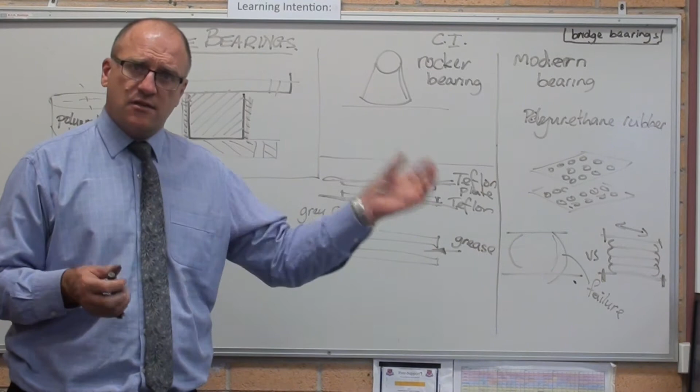Bridge bearings. When you do your maths on a bridge, we say this is a fixed bearing, this is a roller bearing, a movable bearing, a floating bearing. But what is a bridge bearing? A bearing is designed to hold up the weight of the bridge, to bear the weight of the bridge.

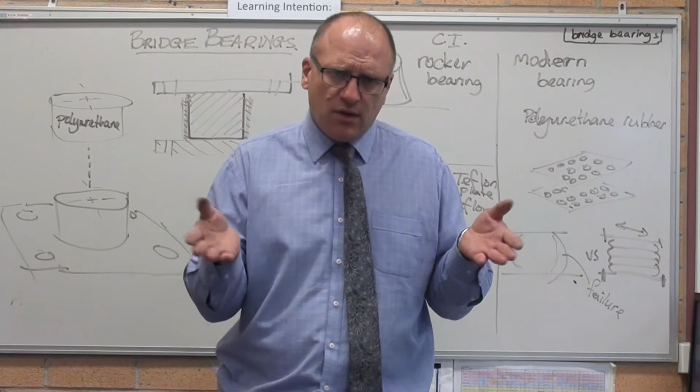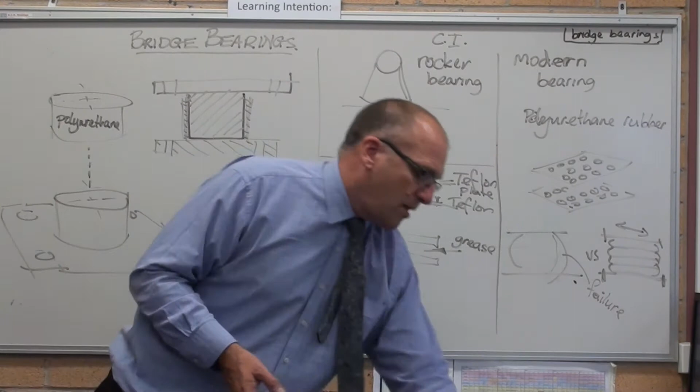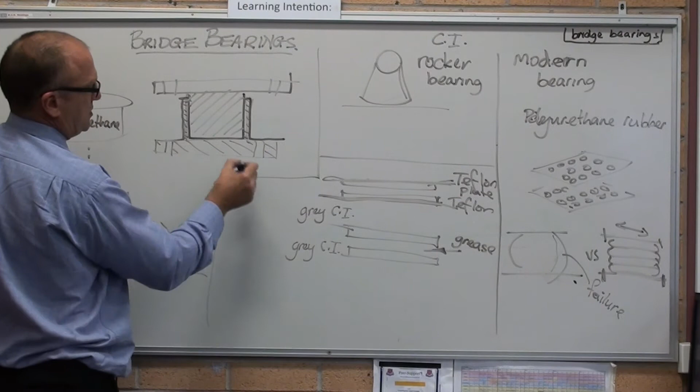Let's have a look at the basic layout of a few types. This is a modern one, a pot bearing. That polyurethane disc is attached to a plate above that I've removed for convenience. It goes in a pot. The entire bridge is sitting on that high strength polyurethane rubber block, sitting above the base of the pot. That's the top polyurethane block. That's a pot bearing.

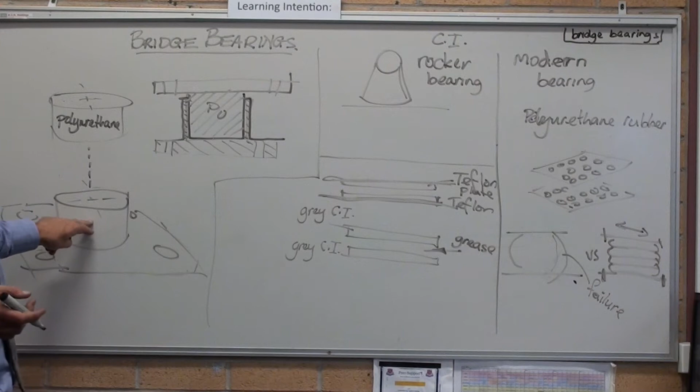Simply, that pot does two things. One, it stops the bridge from going sideways. Secondly, it stops that rubber from swelling outwards with the weight of the bridge on top of it. It traps it in place.

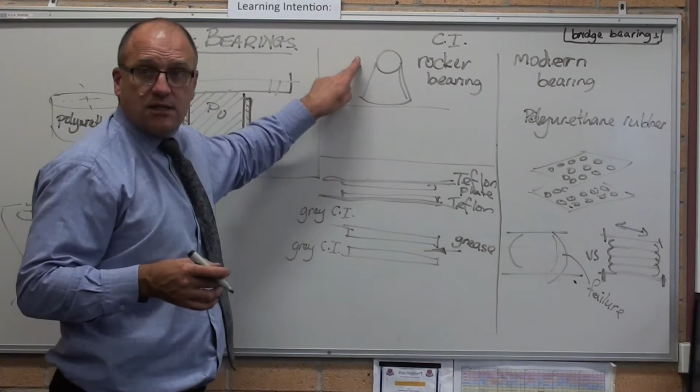If you look underneath the Sydney Harbour Bridge, we've got cast iron rocker bearings. Literally, that's sitting there bolted in place. And then as the bridge moves, that rocks and rolls. So as that goes side to side, the cast iron rocker bearing sits on what looks like a white cast iron plate. White cast iron because it doesn't wear out.

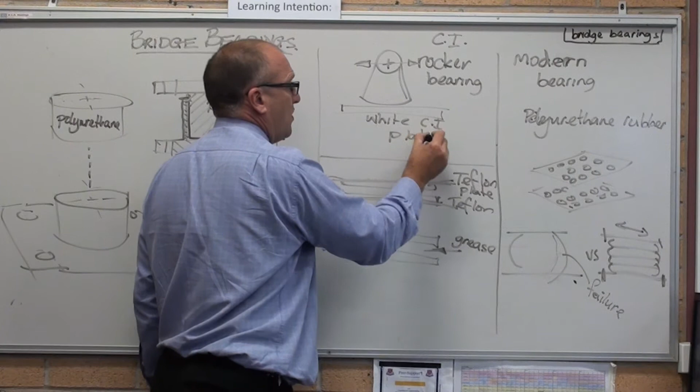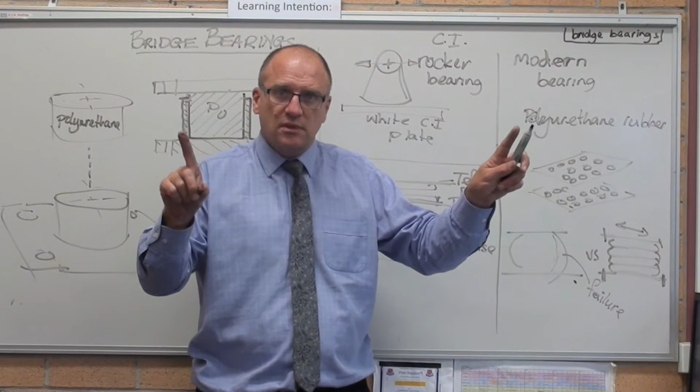Grey cast iron is the best to absorb vibration. One or the other, couldn't tell from looking at it. But it's a cast iron plate of some description, and that rocker bearing's just going sideways and letting the bridge swell. You actually need movable bearings on a bridge because between daytime and night time, the harbour bridge changes in length by that much. If you did not allow for movement, the bridge would physically shrink and pull itself off the piers overnight.

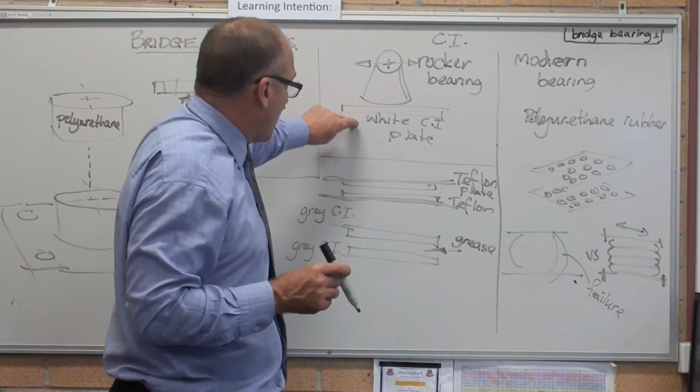Modern bridges use a Teflon plate on a Teflon plate. This is a modern moving bearing, just two Teflon plates rubbing across each other. Grey cast iron and grease is on the harbour bridge, just a wear plate. It might even be white cast iron on white cast iron. White cast iron is brittle, but it does not wear, which is a great advantage because you don't really want to have to lift up a bridge to replace a cast iron pad.

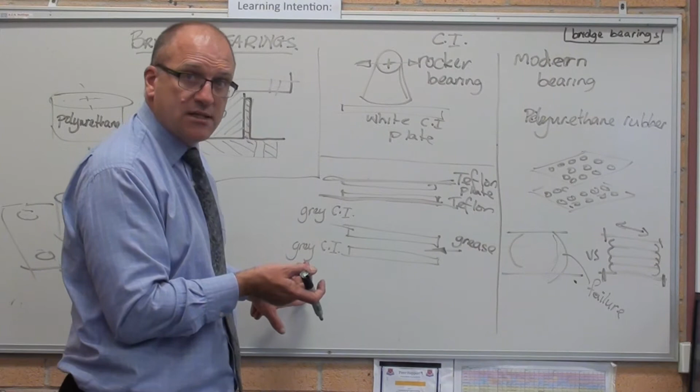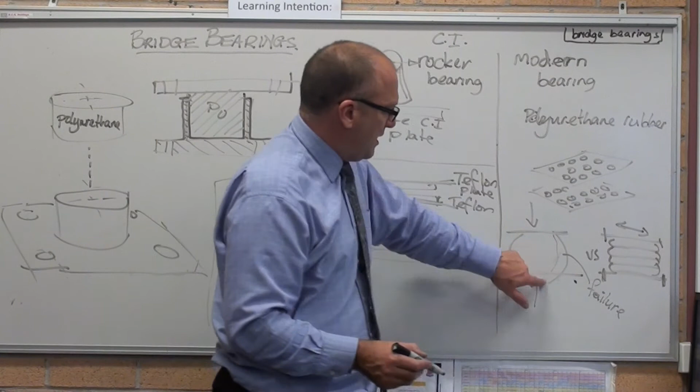The modern bearings, however - modern fixed bearing, modern moving bearing. If I take the weight of a bridge and just put it on a block of polyurethane rubber, as I said earlier, it bellies out and it fails. It literally cracks because you've stretched it too far.

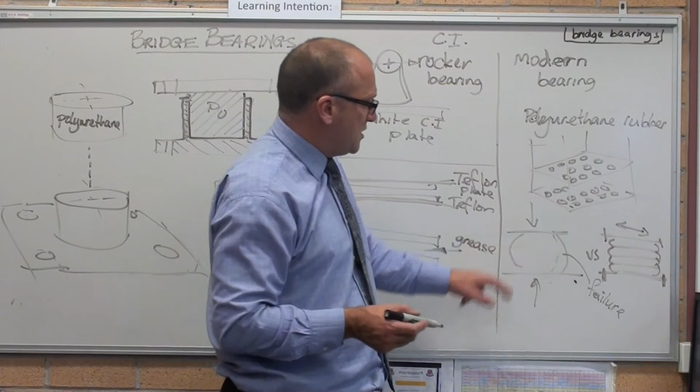How they stop it is they physically pour that rubber into a steel plate with holes all through it. Lots of steel plates, and those steel plates just stitch the bearing together. So instead of one big swell, there's just lots of tiny little swells that don't go past the failure limit. There's a steel plate, steel plate, steel plate, steel plate.

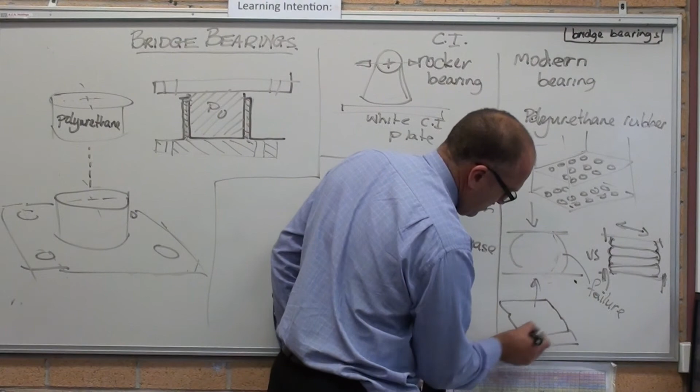That's bolted fixed to the pier. That's bolted to the bridge and moves. And that entire block might shear, so that might go like so. And that lets the entire bridge move backwards and forwards while the bearing's attached to both halves of the bridge, or the bridge and the pier. That's your bridge bearings.